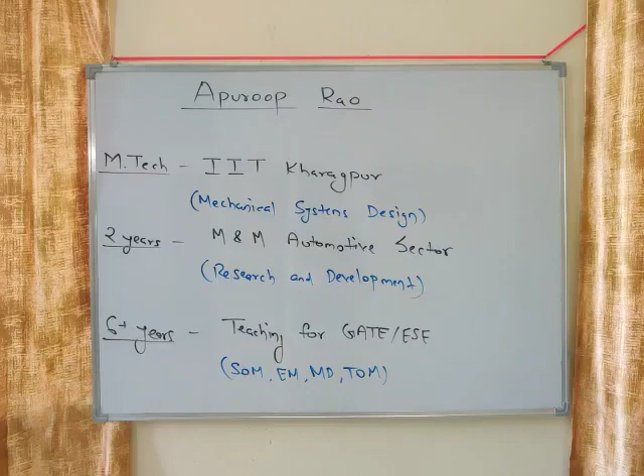Hello dear friends, welcome to another lecture of strength of materials, and today we are going to discuss some amazing concepts related to bending stresses of beams. We are going to discuss axial load plus bending moment, beams of uniform strength, and a very important and interesting topic, composite beams, my friend. So these are all the topics that we are going to discuss today.

Now those of you who are watching me for the first time, let me introduce myself. My name is Apuroop Rao, MTech from IIT Kharagpur. My specialization was mechanical systems design. Then I was recruited from campus. I worked for 2 years in Mahindra and Mahindra automotive sector, in their research and development department, and then I quit my job and I started teaching. I've been teaching for more than 6 years now. I've taught thousands of students preparing for GATE and engineering services, and I teach subjects related to design, strength of material, engineering mechanics, machine design, theory of machines. So you can see my love for design. My MTech was in design, then my 2 years of work was in design, and now my 6+ years of teaching is also related to design, my friends. And I guarantee you, if you keep watching my videos, you will also fall in love with design, my friends. Your concepts related to design will be crystal clear, my friends.

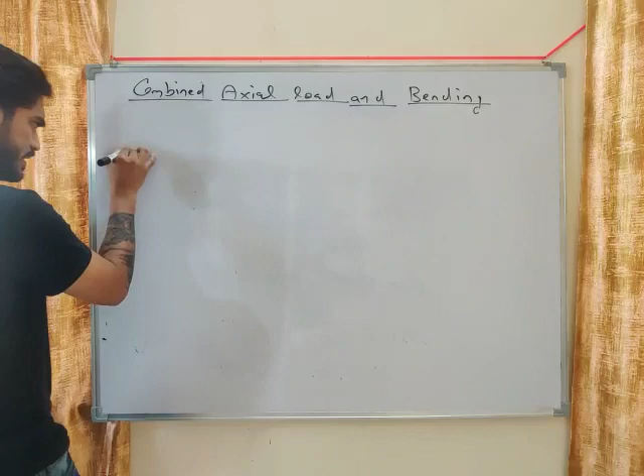Let's consider a simple example. Let's say we have a cantilever beam subjected to a bending moment M, and it is also subjected to an axial load P. So there are two types of load acting on the beam: an axial load P and a bending moment M.

This type of loading, where more than one load is acting on any body, is known as combined loading. So this is a problem of combined loading, my friend: there is an axial load and there is a bending moment.

Now we have to calculate the maximum normal stress in this beam. Our objective is to calculate the maximum normal stress, sigma maximum, in the cross section of the beam. So if there is axial load as well as bending, how do we calculate sigma max? Let's understand that.

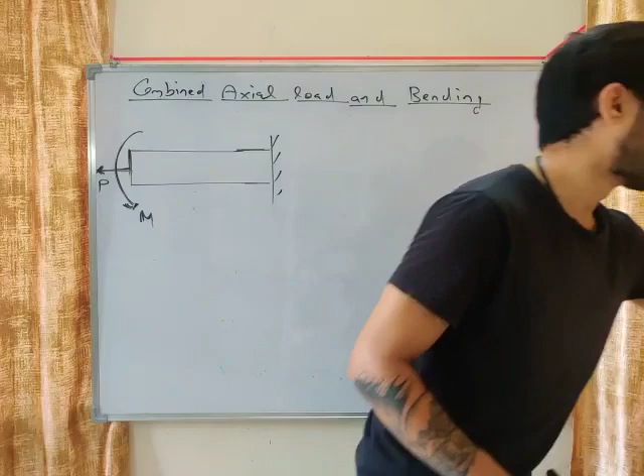Let's say the cross section of the beam is circular. This is the cross section of the beam — if this is the beam, then this is the length, and this side view is the cross section. Let's say it is circular, and this will be the neutral axis at the center.

Now there are two types of load acting on this beam: a bending moment and an axial load, so there will be an axial stress. Due to axial load, there will be axial stress, sigma A, which equals P divided by area. Since it is a tensile load, the stress will be tensile. This axial stress, sigma A equals P by A, will remain the same from top to bottom of the section.

And there will be a bending stress also.

What will be the value of bending stress? Due to this type of load, bending stress at top will be tensile and bending stress at bottom will be compressive. Both will be equal because the neutral axis is at the center. So bending stress at top will be plus My maximum divided by I, and bending stress at bottom will be minus My maximum divided by I.

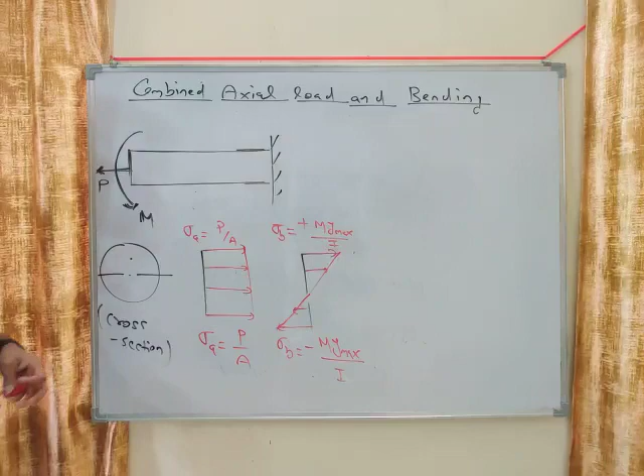So do you see? There are two stresses acting at any point. Consider any point on the cross section, it is subjected to two stresses. There is an axial stress P by A, which will be equal at every point, and there will be a bending stress My by I. It will be maximum positive at top and maximum negative at bottom. Our objective is to calculate maximum normal stress.

Now both these stresses are acting on the same plane and in the same direction. Both are acting on this plane and both are acting in x direction. So if two stresses are acting on the same plane and in the same direction, then the sum of those two stresses can be directly calculated.

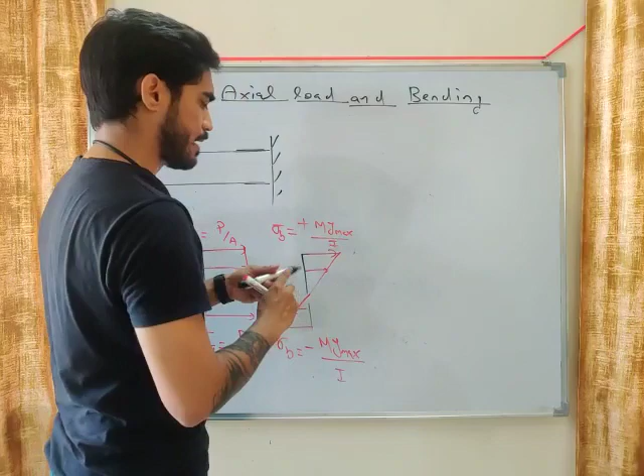Do you understand this point? If two stresses are acting on the same plane and in the same direction, then we can directly add these two stresses. If two stresses are acting on the same plane but in different direction, then we can't directly add them. But if two stresses are acting on the same plane and same direction, then you can directly add these two stresses.

So axial stress, bending stress, both are acting on the same plane, cross section plane, and both are acting in x direction, so we will directly add them. What will happen when you add these two? The tensile stress will be added, because up to from top to neutral axis the bending stress is positive and this is also positive, so both will be added.

But below neutral axis, bending stress is compressive, negative, but axial stress is tensile. So if both these will be added, sigma A it will become sigma A minus sigma B. So at top the stresses will be added and at bottom the stresses will be subtracted, since at top both stresses are tensile, but at bottom this is tensile and this is compressive, so both will be subtracted and you will get something like this.

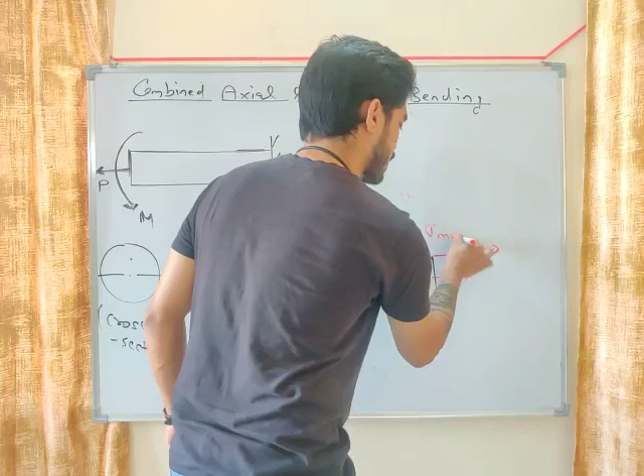This is sigma maximum in tension, and this is sigma maximum in compression. This is the maximum stress in tension and this is the maximum stress in compression. Do you understand this concept, my friend?

Let me explain it using an example so that you will understand better. Let's say the axial stress at top and bottom is 60 megapascal, and bending stress is 100 megapascal here and minus 100 megapascal here. So plus 60 at top, plus 60 at bottom, but bending stress is plus 100 at top and minus 100 at bottom.

So if you add them, what will you get? At top you will get 160 megapascal because both will be added, and at bottom it will be subtracted, 60 minus 100, so it will become minus 40. So your maximum tensile stress is 160 and your maximum compressive stress is minus 40.

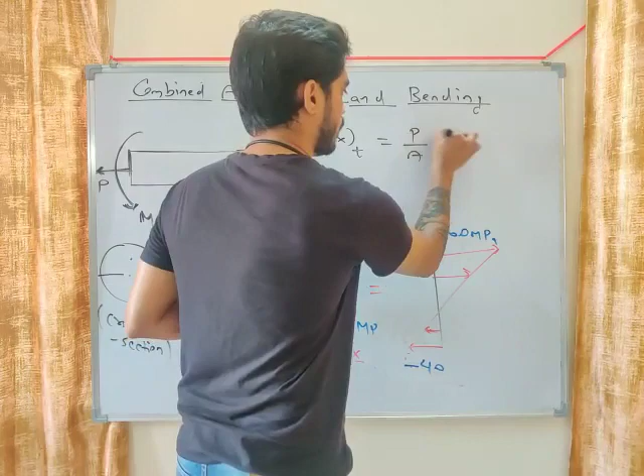Sigma maximum in tension will be equal to P by A plus My maximum by I. This is the maximum stress in tension, 160 megapascal.

For sigma maximum in compression, at the bottom the axial stress will remain positive. If it is tensile at top, it will be tensile at bottom also, so this will remain P by A, but the bending stress will become negative at bottom, so it will become minus My maximum by I. This is the formula for combined axial load and bending.

Very easy, my friend, you don't have to do anything. Yesterday we were calculating bending stress, right? My maximum by I. Today you just have to add the axial stress P by A. So you don't have to do anything, just add the axial stress in the bending stress.

Now don't forget the sign. If you are calculating tensile stress, then this will be plus, and if you are calculating compressive stress, then bending stress will be minus. So the sign of bending stress will depend upon whether you are calculating maximum tensile stress or maximum compressive stress. If tensile, bending stress will be positive; if compressive, bending stress will be negative.

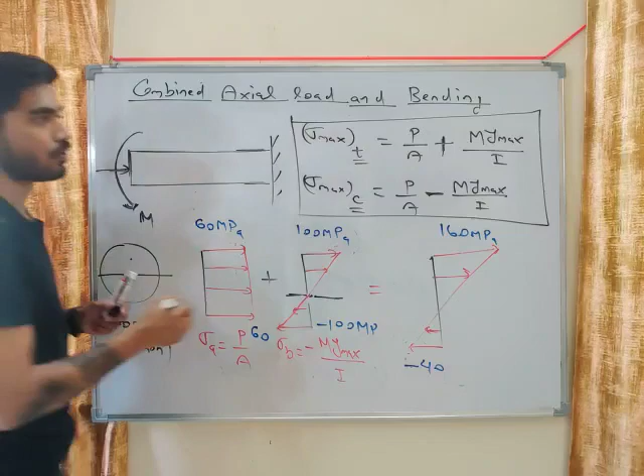Sign of P by A will depend upon the direction of force. If the force is tensile, then it will be plus P by A, doesn't matter whether you are calculating tension or compression stress, this will also be plus P by A. But if I apply a compressive load, then both these will become negative.

So do you understand the sign? Sign of bending stress will depend on whether you are calculating tensile stress or compressive stress, but sign of P by A will depend upon the direction of load. If load is tensile, it will be plus P by A, plus P by A. If load is compressive, it will be minus P by A, minus P by A. Do you understand this concept?

We have to calculate the total normal stress, which will be the sum of axial stress plus bending stress, my friend. Now we will solve some very interesting numericals directly from GATE.

You will see a lot of questions based on this, quite a few numericals based on combined axial and bending stress. So we will solve them one by one from previous year GATE questions. I am trying to solve as many previous year questions as possible, so that you will get an idea what type of question will be there from every topic.

So let's solve some numericals related to combined axial load and bending. What you have to do? You have to just add the axial stress and bending stress. Axial stress will be P by A, bending stress will be My by I. So you just have to add them, but you have to take care of the sign, whether it will be positive or negative. This is very important, my friend.

So let's see the first numerical, my friend. Most of the students get confused in this numerical, but I will tell you a very simple way to understand this question. So this is the question, what is given in the question?

We have a link which is under a pull. This is a link, or you can say it is a bar, link, bar, beam, whatever you can say. Cross section is rectangle, this is 50 mm and this is 15 mm.

It is under a pull. A load is applied like this, it is under a pull of 4 kilonewton. Pull means tensile load, so it is under a pull of 4 kilonewton. And what you have to calculate? You have to calculate sigma maximum in compression, the maximum compressive stress. So this is the problem.

Note down this problem, and then we will try to solve it, my friend. Very important problem, this was asked in engineering services, but very important question. So note down this question, and then we will try to solve it using our procedure.

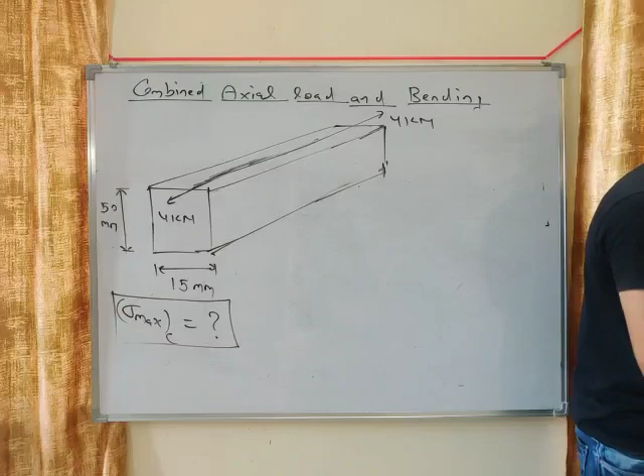Now the problem is that people get very confused about this diagram. What is this diagram? They are not able to understand because the visualization is wrong, my friend. So I will tell you how properly this question should be visualized, how to imagine this problem, how to see this problem.

So this diagram that is given is an isometric view, a 3D view. What you have to do is draw this two-dimensional view, my friend. Draw this front view of the link. Okay, so this is the link. From front it will look like this, and from side it will look like this. This is the side view.

In the question, an isometric view was given, but this is the front view and this is the side view, or you can say cross section view. What is the cross sectional area? 15 mm by 50 mm. Width is 15, height is 50, and this is the front view.

The load is acting like this. This is 4 kilonewton, this is 4 kilonewton. Now you will be able to analyze it properly, visualize it properly.

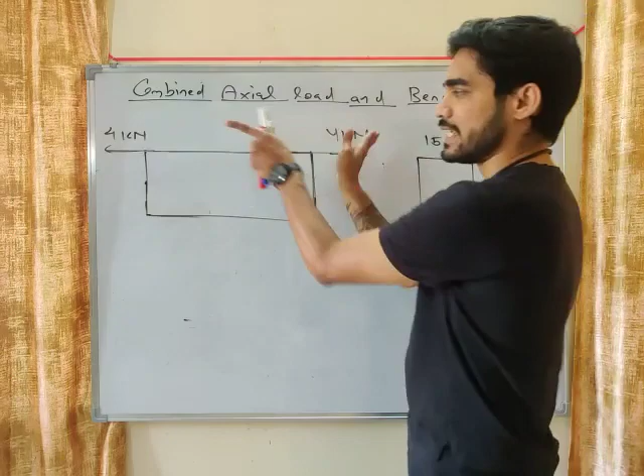Now see, this is a bar subjected to axial load. This is an axial load in the direction of length. If it is acting like this, transverse load; if it is acting like this, axial load. So this is an axial load.

But what is the problem, my friend? This is the cross section, side view. This is the plane where we have to calculate the stress. Look at this force - this force is not acting at the centroid of the cross section. Centroid of the cross section is here, but the load is here.

I told you, in case of axial load, whenever there is a load acting anywhere, whenever you have to calculate the stress on any plane, you have to transfer the load to the centroid of the plane. So right now the load is acting at the top, but the centroid is here. So what we will do in this problem is transfer this force from here to the centroid, my friend.

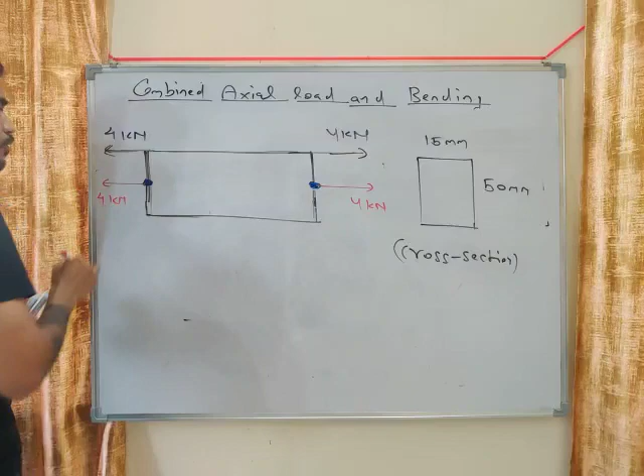So if you transfer this load from the top to the centroid, what will you get? You will get a force of 4 kilonewton, no problem there. The force will remain the same, 4 kilonewton, but there will be a moment due to this distance.

What will be this distance, my friend? Total height is 50, so this distance will be 25 mm. So due to this distance, it will create a moment like this. What will be this moment? 4 into 25 means 100 kilonewton mm. That much moment is developed.

So now we have transferred the force to the center of the beam, my friend. So what are we getting? We are getting two types of load. Now we have an axial load as well as a bending moment. Very important concept, my friend.

Whenever there is a load acting anywhere on the body, and you have to calculate the stress at any plane, transfer that load to the centroid of the plane. So I have transferred 4 kilonewton to the centroid, and so I am getting a moment also.

Now what do we have to calculate? We have to calculate maximum compressive stress. Now, I told you the sign of axial load will depend upon the direction of force. So the direction of force is tensile, so this will be plus P by A. Axial stress will be plus P by A.

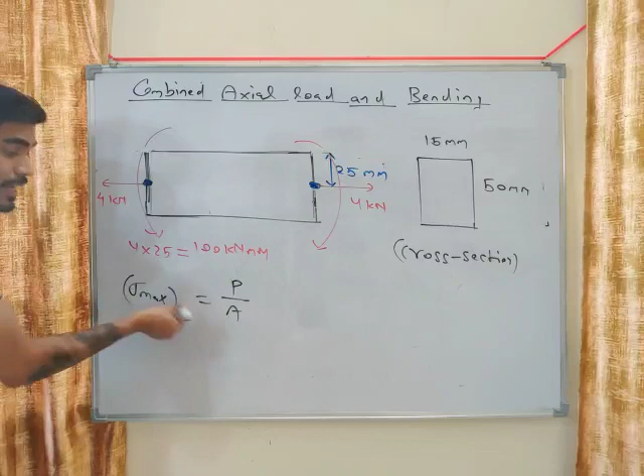But the sign of bending stress will depend upon what we are calculating. Here, what are we calculating? Compressive stress. So if we are calculating compressive stress, then this will be minus M y maximum by I. Do you understand this, my friend? P by A, the sign of this depends on direction of force - it is tensile, so it will be plus. But for bending stress, we are calculating compressive stress, so it will be minus.

Now put the values here, my friend. Very easy, put the values here, you will get the answer. So what is the value of force? 4 kilonewton means 4 into 10 to the power 3 Newton. What is the area, my friend? This is the cross section, so what will be the area? 15 into 50. Then minus, what is the bending moment?

100 kilonewton mm, we have to convert it into Newton mm. So it will be 100 into 10 to the power 3 Newton mm. I converted kilonewton into Newton.

What will be Y maximum, my friend? 25. Y maximum means the distance of top or bottom from the centroid. So Y maximum is 25 divided by I. So what will be I? BH cube by 12, 15 into 50 cube by 12.

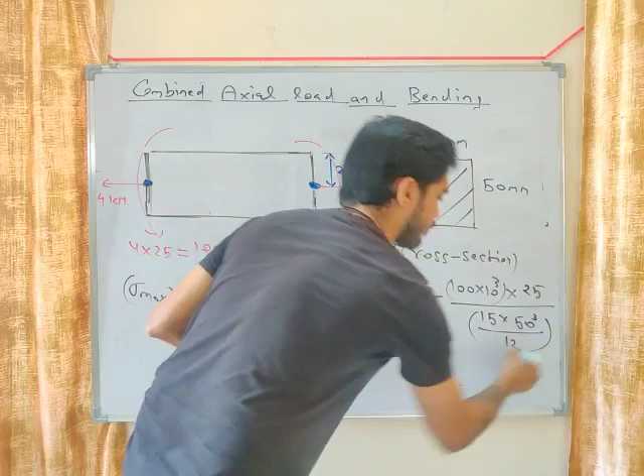So this is My maximum by I. So what will you get, my friend? Maximum stress in compression. Calculate it and tell me what will you get. So this will become 4 into 10 to the power 3 divided by 15 into 50.

This will become 5.33 minus My maximum by I. If you solve it, this will become 16. So what will you get, my friend? 5.33 - this is the axial stress, and 16 - this is the bending stress.

What will you get? You will get minus 10.67 megapascal. Why negative sign? Because our stress is compressive. If you add them, you will get a compressive stress. So do you understand? Minus 10.67 megapascal. This is the answer, my friend.

Okay, so do you understand the problem, my friend? Let me explain it using a diagram, using the diagram let me explain the same thing, what is happening here. Okay, so this is the cross section, my friend.

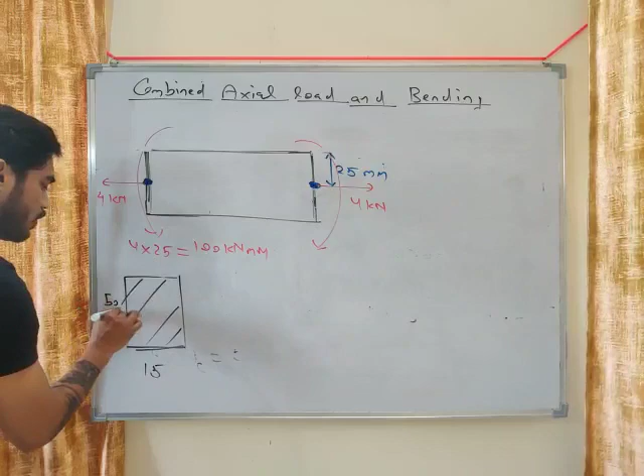15 mm by 50 mm. This is the cross section, 15 mm by 50 mm. This is the neutral axis. What is the axial stress we calculated? 5.33, right? Axial stress that we calculated is 5.33, so it is acting like this. This is 5.33. From top to bottom, the stress is

5.33 megapascal. Okay, bending stress is how much? 16 - bending stress is 16. So it will be plus 16 at top and minus 16 at bottom. So bending stress is like this: plus 16, minus 16. Now what we are doing?

We are adding both of them. So what will we get? At top, the stress will become 16 plus 5.33, the stress will become 21.33. And at bottom, how much will you get? You will get minus 10.67.

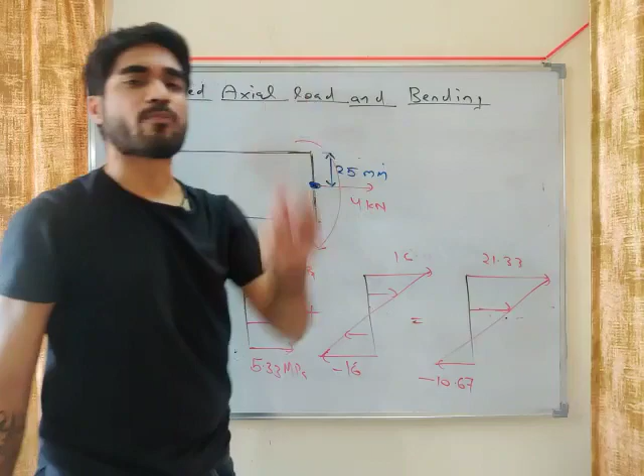So do you understand? In this question, they were asking maximum compressive stress, so what we did: 5.33 minus 16 minus 10.67. In the same problem, if they ask you to calculate maximum tensile stress, then what you will do? 5.33 plus 16, so it will become 21.33. So in this question, maximum tensile stress is 21.33, maximum compressive stress is minus 10.67 megapascal.

Very important question, my friends, because the same concept, the questions based on these concepts are repeatedly asked in GATE, engineering services, any PSU exam. Okay, so very important concept. Understand this concept. Okay, so we have solved one problem, my friend. We will solve a few more problems based on this concept so that you will understand it properly.

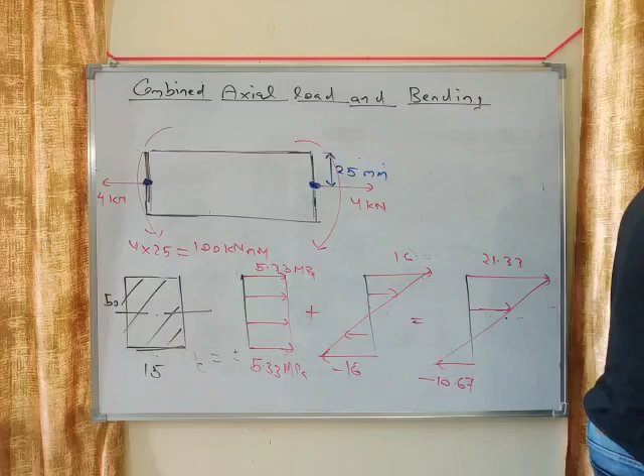Okay, now another question, my friend. This time I will pick a question from GATE. So this is the question, my friend, from GATE 2008 civil engineering question. Okay, I will solve a problem from GATE 2008 civil engineering question. Okay, another very interesting question.

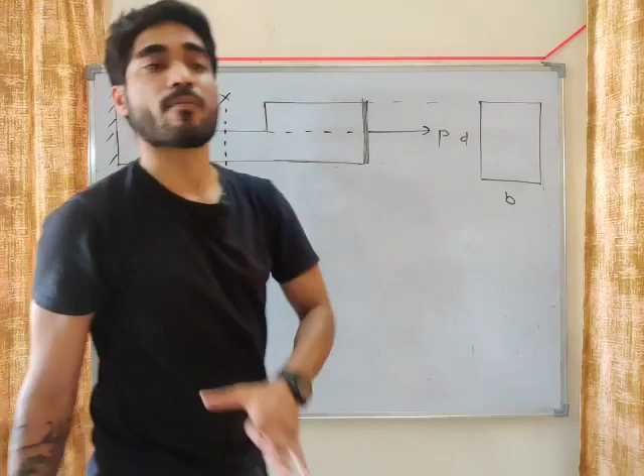I am expecting solution from you guys. Please solve this question, please solve this question. Understand the problem first. Understand the diagram first, my friend.

What they are asking you to calculate is stress at this plane, not at this plane. The load is acting directly at the centroid of this plane, but the force is not acting at the centroid of this plane. So what do you have to do?

The centroid of this plane will be here on this line, but the force is right now not acting at the centroid of this plane xx. So what you will do, you will transfer force P from here to here. Right now it is acting here, I have to transfer it here, because centroid of this plane xx is here.

So if you transfer it here, what you will get? A force P, and you will get a moment. Okay, what is this distance, my friend? Tell me what is this distance. This height is d by 2.

This total height is d. This height is given, this height is d by 2. The height of xx plane is d by 2. So what will be this? D by 4, this will be d by 4. This total height is d, this height is d by 2, this height is d by 2. And this height from this center to this center is d by 4.

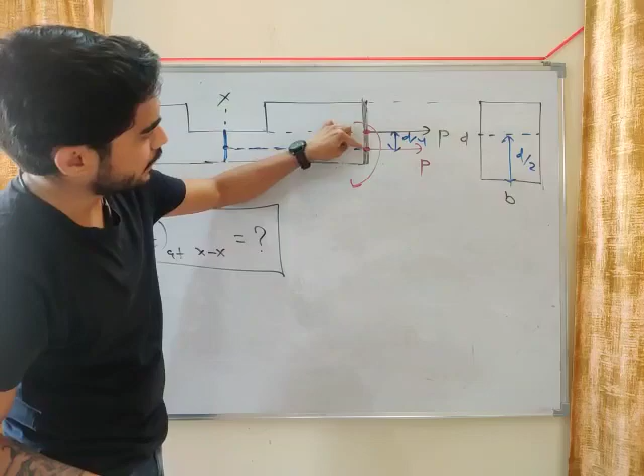So what will be the moment, my friend? Moment will be PD by 4, my friend.

Now calculate the maximum tensile stress at xx plane, my friend. So what you have to do? Axial stress plus bending stress. You have to calculate maximum tensile stress, right? So it will be P by A. P is tensile, so it will be P by A, and bending stress will be tensile because we are calculating tensile stress. So bending stress will be plus My maximum divided by I.

Okay. Now put the value here. Force is P. What will be the area? Now most of the students, what they do? Area B into D. You are not calculating stress on this plane. The area of this plane will be B into D, but the area of this plane, XX plane, it will be only this much.

This much. So what will be the area? B into D by 2. The area will be only this much, B into D by 2, because we are calculating stress on this plane, not on this plane.

Okay. Plus, what is the moment, my friend? PD by 4. What is Y maximum, my friend? What will be Y maximum? D by 4. Okay, look at this area, forget about this area. Now this is your area.

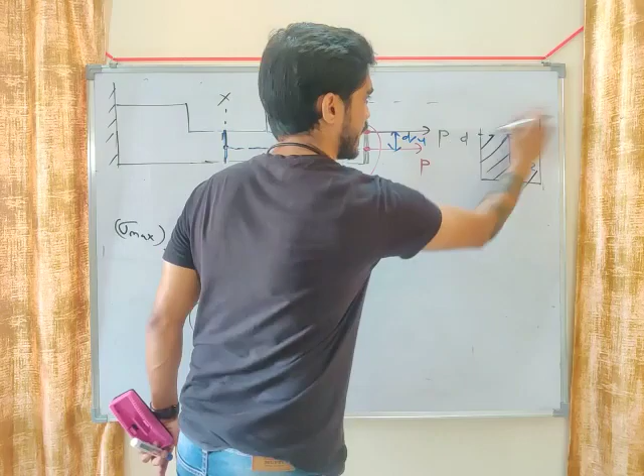So what will be Y maximum, my friend? Total height is D by 2. So Y maximum will be D by 4, divided by I. So what will be I? BH cube by 12, height is D by 2. So B into D by 2 cube by 12. Okay, this is your I.

Now add these two, what you are getting? Calculate it, what you are getting? This will be 2P by BD, plus. Calculate it, what you will get? This D will be cancelled. Okay, this will become how much? Calculate it, how much? This will become 12.

This will become 6P by BD. Let me check my answer. So 2P by BD plus 6P by BD. What you will get? Tell me in the live chat. What you will get? 8P by BD.

This is the maximum tensile stress in the cross section. If I ask you to calculate maximum compressive stress, what will you get? 2P by BD, and this will become minus 6P by BD, so maximum compressive stress will be minus 4P by BD.

This minus this. But here I am asking you to calculate maximum tensile stress, so it will be this plus this, 8P by BD. So this is the answer to this question, my friend.

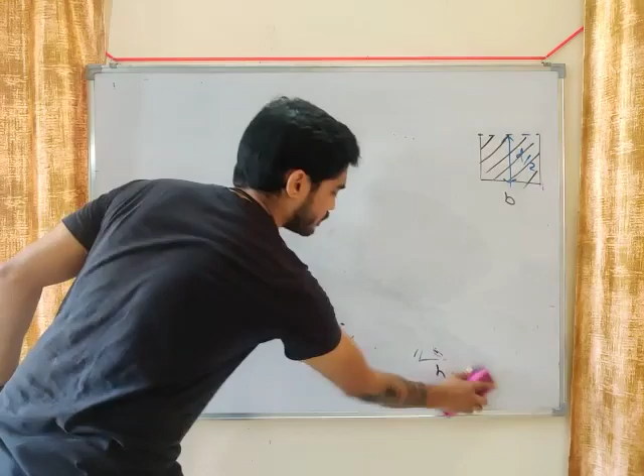All right, so let's move on to the next question. We will solve one more question because it is a very important concept, one more question from combined axial load plus bending, my friend. So what question will we solve?

Another question from GATE, this time from mechanical engineering. This was asked in GATE 2008 from mechanical engineering.

So this is a beam, an L-shaped member. This is force F. The cross section is this, 2B by 2B. This is the cross section.

They are asking you to calculate what will be the sigma at this point, sigma at point P. This distance is given as L minus B. They are asking you to calculate what will be the sigma at point P, here. This is point P. They are asking what will be sigma here. So do you understand this question?

This is the cross section 2B into 2B. They are asking you to calculate what will be the stress at point P. What will be the stress at point P?

So what will you do, my friend? Point P is a part of this cross section, right? It is at the top of this cross section. Now the cross section has a centroid here. This is the centroid, and the force is not acting at the centroid. So what will I do?

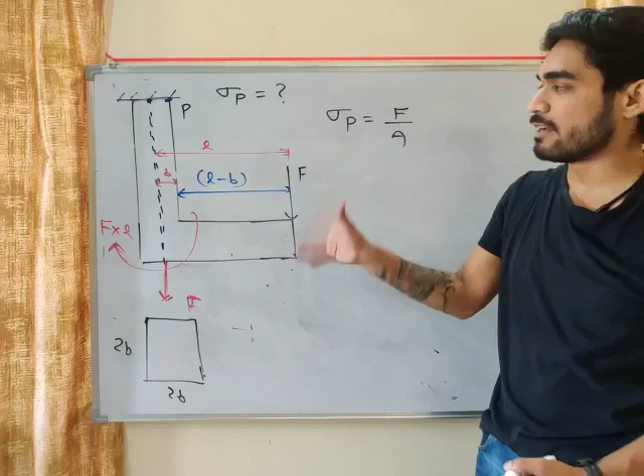Tensile or compressive? Tell me, will it be tensile or compressive? It will bend like this. So tell me, at point P, will there be tensile stress or compressive stress?

There will be tensile stress. Look at this, the length will increase here, so this will be tensile stress, so plus My by I.

Here Y will be maximum, so My maximum by I. So what is the area, my friend? 2B into 2B, this is the cross section. So area will be 2B multiplied by 2B, plus what is the moment, my friend?

F into L. What is Y maximum? B. And what will be I? 2B into 2B whole cube divided by 12, BH cube by 12. This will be sigma at point P.

So do you understand this? What will be the area?

2B into 2B, what will be the moment M? Moment is F into L. We transferred the force F on the centroid, not at point P. Don't get confused, we are not transferring the force at P, we are transferring the force at the centroid.

Then we put the values in the equation. What will you get here? F upon 4B square, what will you get here? This will become B, this B will be cancelled. What will you get here? You will get 3 into L.

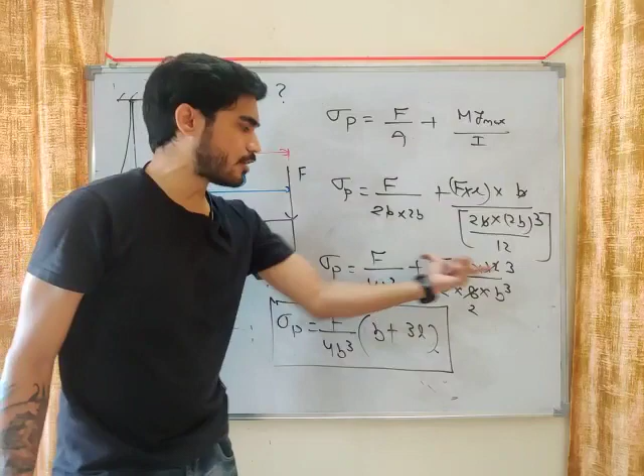This is the stress at point P, normal stress at point P: F upon 4B cube into B plus 3L. Solve this equation and you will get this: F upon 4B cube into B plus 3L. I have taken F upon 4B cube common, so you are getting B plus 3L. This is the normal stress at point P.

So do you understand this question, my friend? Do you understand the solution? I have taken 3 examples from previous year GATE and engineering services questions to explain the concept of combined axial load plus bending.

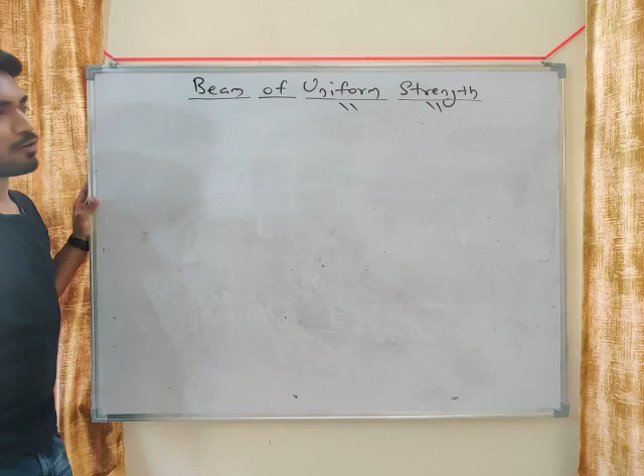So we will discuss this concept in detail so you get the entire concept clear about beam of uniform strength. First, what is uniform strength? Note this down if you want. I will write the definition so you understand it: beam of uniform strength is a beam where maximum bending stress at every section of the beam is constant.

Note this definition, understand this definition, my friend. Beam of uniform strength is a beam where maximum bending stress at every section of the beam is same or constant. So beam of uniform strength is a beam where maximum bending stress at every section is same.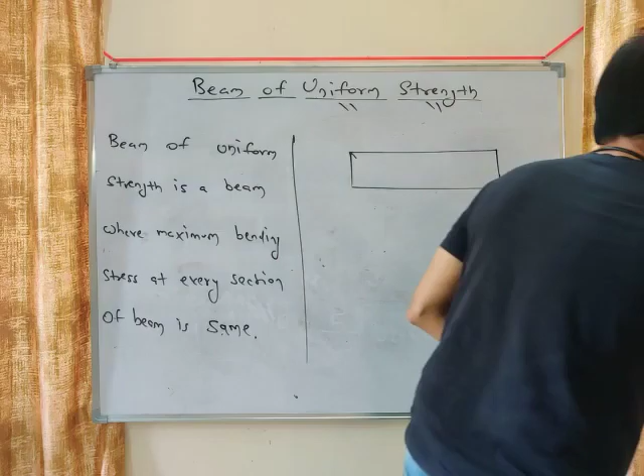Now I will explain this using an example. Let's say this is a beam. Now there are different sections of this beam: this section, this section, this section. So there are different sections, section 1, section 2, section 3. It will be called a beam of uniform strength if it is subjected to maximum bending stress same at every section.

If the maximum bending stress, let's say sigma maximum at this section, is 100 megapascal, sigma maximum at this section is also 100, and sigma maximum here is also 100. So you can see sigma maximum at this plane, this plane, this plane is same. So this beam is known as beam of uniform strength, my friend.

Okay, now let me tell you using an example how do we get a beam of uniform strength. Let's say we have a prismatic beam.

What do we mean by prismatic beam? What do we mean by this word prismatic? Tell me in the live chat. What is prismatic, my friend? This word is used many times.

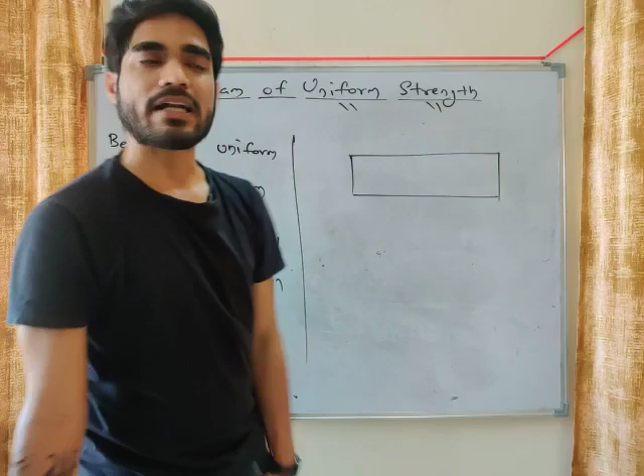So what is prismatic? Prismatic means cross section is constant. Cross sectional area from here to here is constant. This is not a prismatic beam, this is a tapered beam. This is a prismatic beam. Do you understand the meaning of prismatic?

So this is a prismatic beam subjected to pure bending. Now another concept, pure bending. Yesterday we discussed what is pure bending. If it is only subjected to bending moment, then it is pure bending. And you can see that from here to here, bending moment is constant at every section.

Now consider two sections. This is, let's say, section 1-1. This is section 2-2. What will be sigma maximum, my friend?

Sigma maximum means m into y maximum by I, right? Or I can write it as m by z. What is z? Yesterday we discussed section modulus. Z is nothing but I by y maximum. For rectangle it is bh square by 6, and for circle it is pi by 32 d cube. So I can write m into y maximum by I as m by z.

This is sigma maximum. Now for 1-1, what will be the value of bending moment, M? From left or from right? There is only one couple, m. So what will be the bending moment at this plane? M. What will be the bending moment at plane 2? Same, m. So bending moment at 1-1 and 2-2 is same, m.

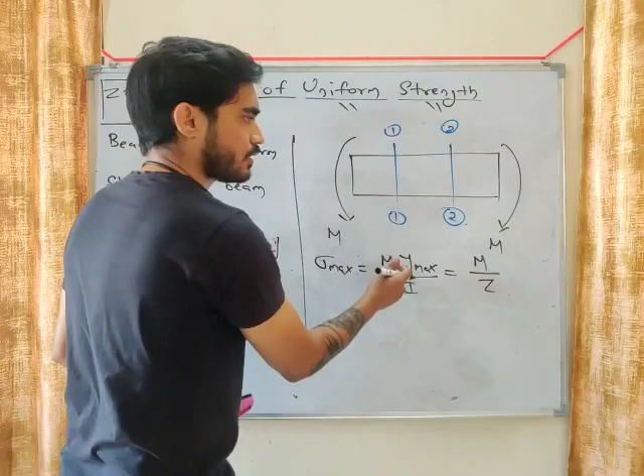Now z at 1-1 and z at 2-2 will also be same, right? Because the cross section is constant. So z of this plane and z of this plane will also be same. That means m and z of both these planes are same. So sigma maximum of plane 1-1 will be equal to sigma maximum of plane 2-2.

So what does this mean? This beam is a beam of uniform strength, because the maximum bending stress at this plane and at this plane is same. M is same, Z is also same, here and here.

So note this point down right now, okay? And nobody will tell you this. Prismatic beam subjected to pure bending is a beam of uniform strength. Note this in your notebook, my friend, and highlight this point.

What do we mean by uniform strength? Maximum stress should be same from this end to this end. At every section, maximum bending stress should be same, then it will be called beam of uniform strength. Do you understand the meaning of beam of uniform strength, and the example? A prismatic beam subjected to pure bending is a beam of uniform strength, my friend. It is a very important concept.

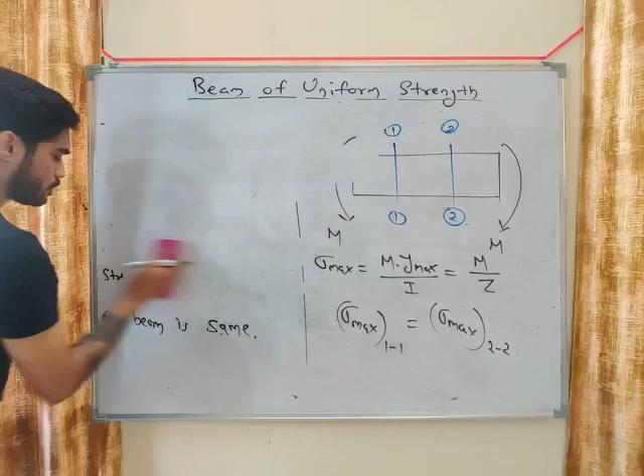Okay, now this is a prismatic beam subjected to pure bending. Let's consider a prismatic beam, but it is not subjected to pure bending. Let's consider a cantilever beam. It is a prismatic beam because cross sectional area is constant, and it is subjected to a load W here. Let's consider two planes, plane 1-1 and plane 2-2. Let's say this distance is 1 meter, and this distance is also 1 meter.

Now, sigma maximum is m by z. So what will be sigma 1-1 here? M will be W into 1. Forget about the sign convention, don't worry about plus W minus W right now. What will be the bending moment at this plane?

What will be the bending moment at this plane? M will be W into distance 1, so W into 1 meter. Now what will be the section modulus? Z, right? So the bending stress will be W by Z, which is the bending moment divided by Z.

What will be the stress at point 2,2, the maximum bending stress? What will be the bending moment there? W into 2 meter, so it becomes 2W. But Z will remain the same because this is a prismatic bar. So bending stress at 1,1 is W by Z, and bending stress at 2,2 is 2W by Z.

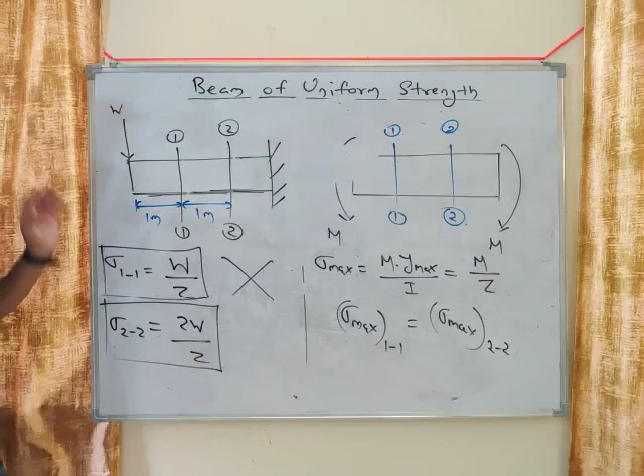So is this a beam of uniform strength? No, it is not, because the bending moment is different while Z is constant. In the equation sigma max equals M by Z, M is different and Z is constant. If Z is constant and M is different, sigma will also be different. Here sigma is W by Z, and here sigma is 2W by Z.

So this is not a beam of uniform strength, but we can make it one. I will explain how you can turn any beam into a beam of uniform strength. We will discuss the procedure for designing a beam of uniform strength - a very important procedure.

You might get a theory or conceptual question based on this concept. So let's say we have a cantilever beam subjected to load W, with length L. The height of this beam is constant H, but the width of the beam is not constant.

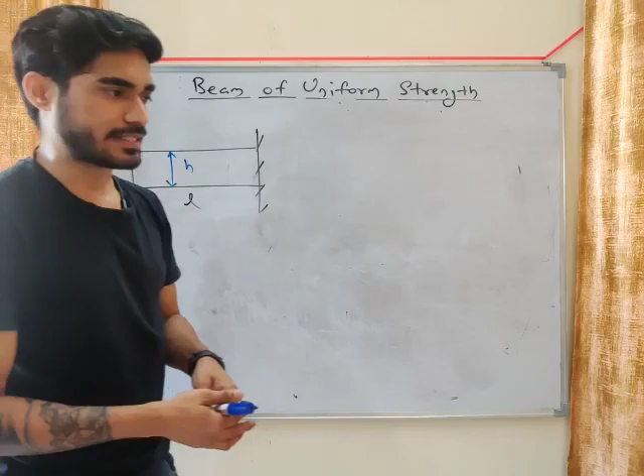Width of the beam means, let's say this is a beam - this is the height you see from here, and if you look at this beam from the top, this will be the width. This body has constant width - this is the height, this is the width you see from top. Right now the width is constant.

But if the cross section is constant, it will not be a beam of uniform strength. See, sigma maximum is M by Z. M is not constant, M is changing from here to here - M is increasing. Now if Z is constant and M is increasing, then sigma will also increase.

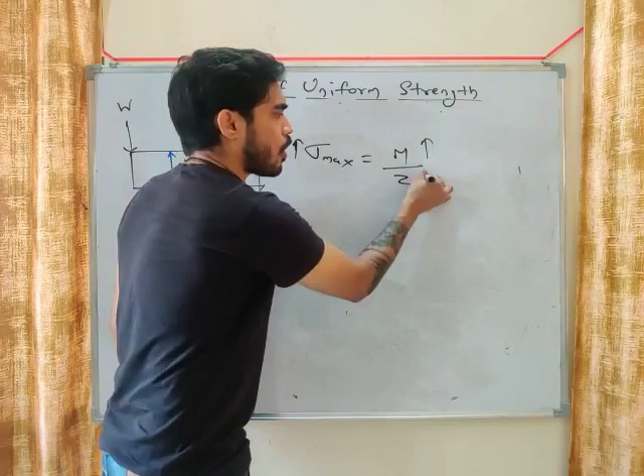So what you have to do: if M is increasing, Z should also increase in the same ratio. If M is getting doubled, Z should also get doubled. If M is getting tripled, Z should also get tripled. Then this ratio will become constant, and sigma will become constant.

So what you have to do in this beam is increase the value of Z. Now what is Z of a rectangle? Z of rectangle is BH square by 6. Now I am telling you that H should be constant. So if you want to increase Z, what will you increase? You will increase B, the width.

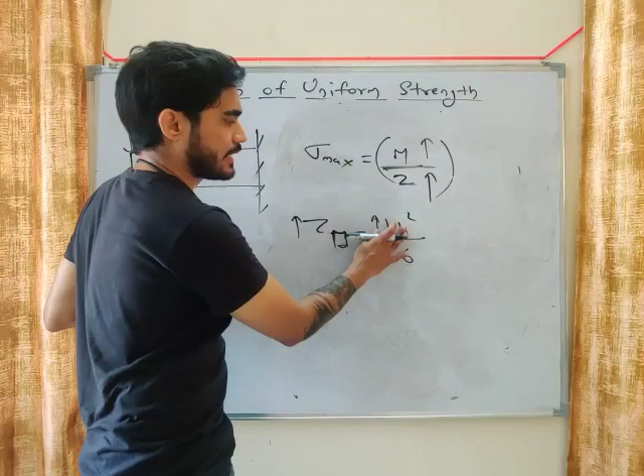So in order to make this beam of uniform strength, as M increases, Z should also increase in the same way. Then this ratio becomes constant, sigma becomes constant, and it becomes a beam of uniform strength. If you keep Z constant while M increases, sigma will increase - but I don't want sigma to increase, I want it constant. So if M is increasing, Z should also increase. Z equals BH square by 6, and since H should be constant, B should increase.

In order to increase Z, B should increase. Now what is the equation of M? What will be the equation of M?

Consider any section at a distance x, with height H. What will be the equation of m? Wx, okay forget about the sign. M will be Wx. So how is m increasing?

Linearly. So how should z increase? Linearly, it should increase linearly. And z increasing means b is increasing. So m is increasing linearly, so z should increase linearly, which means b should increase linearly.

So this beam, if you look at it from top, this is the side view. We are looking at the beam from this view. If you look at it from top, then the width should be like this. This will be a linear variation of width.

Why is the width varying linearly? Because m is varying linearly, so z should also vary linearly. If m is varying parabolically, z will also be parabolic, so that ratio will become constant. So if m is increasing linearly, z should also increase linearly.

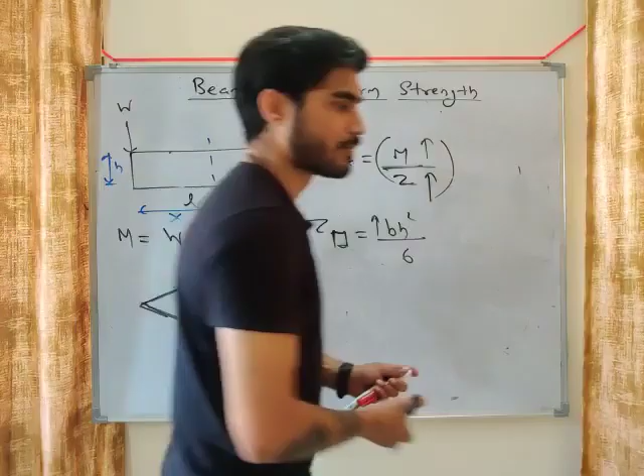I am telling you that we need to keep h constant, so b should vary linearly. Now this is the logical explanation. Let me tell you mathematically how this will be a linear variation.

So what we are going to do, let's say the maximum width is b. Maximum width is fixed, we cannot increase the width beyond this. So let's say maximum width is b. Now what we will do, for this beam of uniform strength...

Sigma maximum at every section should be same. For beam of uniform strength, sigma maximum at every section should be same. So sigma maximum at this x section should be equal to sigma maximum at the fixed end. If it is a beam of uniform strength, sigma maximum here and here should be same.

Now what will be sigma maximum at this plane? M by z, right? Sigma maximum means m by z. So what will be m? W into x. On this plane, m will be W into x.

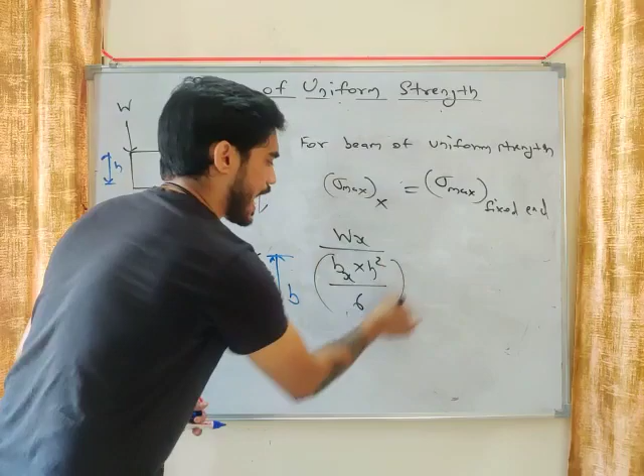What will be the height, my friend? What will be z, my friend? Let's say the width here is bx. So I will write this as bx into h square by 6. Height is constant. This will be equal to m by z.

M by z of this plane should be equal to m by z at the fixed end. So what will be the m at the fixed end? W into L. Bending moment at fixed end will be W into L, divided by z at the fixed end.

So at the fixed end, the width will be b, the maximum width, and height is constant. So this will become b h square by 6. We are assuming rectangular section. Okay, now...

W into 6, into h square, this all will be cancelled. What will you get from here? B at any section x will be equal to b into x by L. B into x by L.

Look at this equation, what is this equation? This is the equation of a straight line, that's why we are getting this. If it is x square, then it will become parabolic. Right now it is a straight line.

So this is the beam of uniform strength: at any distance x, your width should be b into x by L. So at any distance x, the value of width will be bx by L. So the width should be like this.

If the width is constant, your z will become constant. M is changing and z becomes constant, so sigma will start to change. But right now, what is happening? M is also varying linearly, z is also varying linearly, so your ratio m by z will become constant. And now your beam has become a beam of uniform strength.

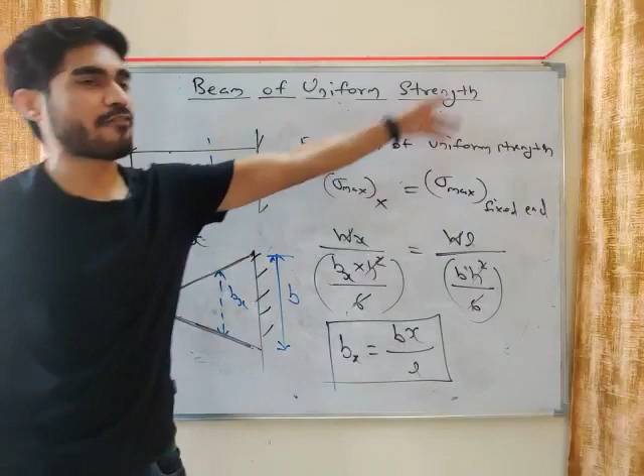So this is the procedure to make a beam of uniform strength. You will get a question from this particular example, which is very important. Cantilever beam subjected to point load, height is constant. How should the width vary? Width should vary linearly. For the beam to be of uniform strength, width should vary linearly.

So this is a procedure of making a beam of uniform strength. I hope you understand the concept behind beam of uniform strength, my friend. Very interesting concept. Now we will move on to the next very interesting topic, my friend.

The next topic is known as composite beam. Now, what is a composite beam? I told you the meaning of the word composite - it means made up of more than one material. So composite beam is a beam made up of more than one material. In this topic, we are going to discuss beams which are made of more than one material.

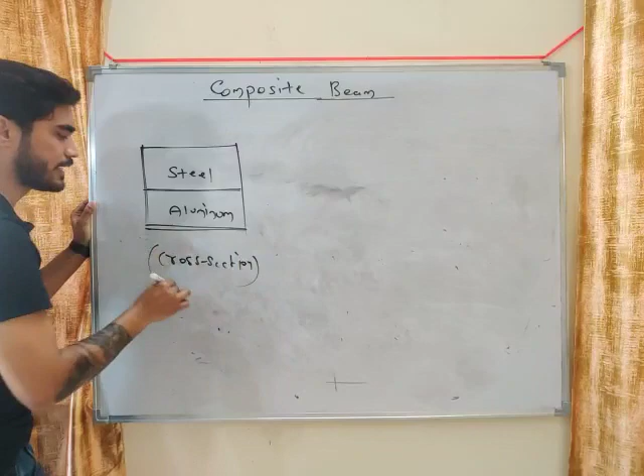What will be the examples of composite beam? This is an example - steel, aluminum. There are two different metals, steel and aluminum. This is the cross section of the beam - half of the cross section is made of steel, half is made of aluminum. So this is an example of composite beam.

This is another example of composite beam. Let's say there is a wooden beam. At top and bottom we have steel plates - this is known as reinforcement. Wooden beams - usually in many structures you will see wooden beams, especially in foreign countries where the temperature is very low, they make structures of wood so that heat will be trapped inside the home.

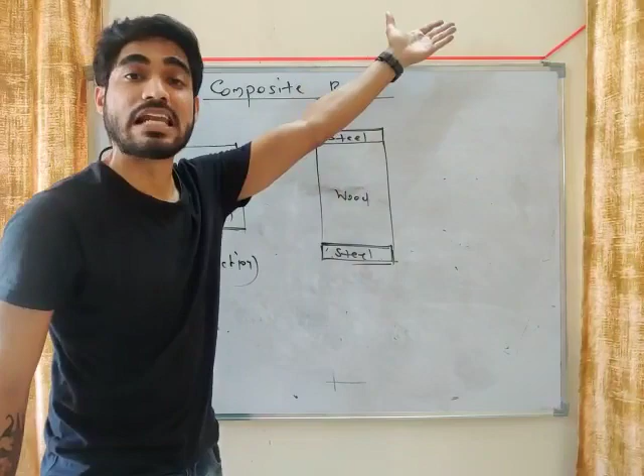Now, wooden beams are very weak, their strength is very less. So if you want to increase the strength of wood, you reinforce it with steel plates. Here we are placing two steel plates at top and bottom so that the strength of the wooden beam will increase. Let's say right now it is only capable of sustaining 10 kilonewton meter moment - if you put steel plates, then it will start to sustain more than 10 kilonewton meter. The strength of the beam will increase. So this is known as reinforcement.

Look at these two beams - they are made of more than one material. Here there are two materials, steel and aluminum. Here there are two materials, steel and wood. So this is known as composite beam. In this topic, we will see how we can calculate bending stress in these type of beams.

In this type of beam, you cannot directly use sigma equals to m y by I. Why? Which theory did we use to find this sigma? Sigma by y equals to m by I equals to E by R - this equation is derived from Euler-Bernoulli's beam theory, and in that theory there is an assumption that the material is homogeneous. Right now, is this material homogeneous? No. Homogeneous material means at every point the property should be same, but here the property of steel is different, property of aluminum is different, and property of steel and wood are different.

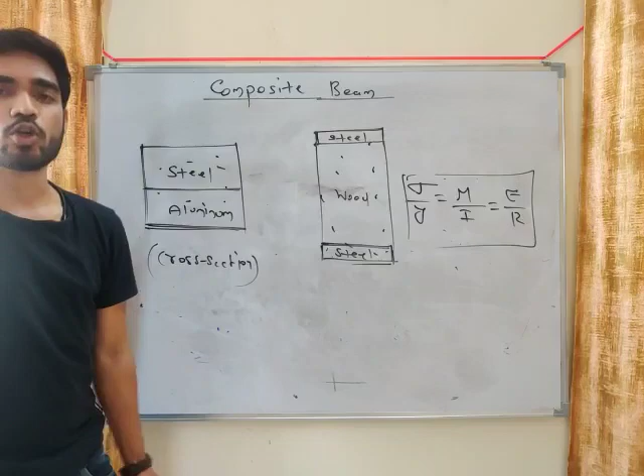So this is not homogeneous, and if the material is not homogeneous, we cannot directly use this equation sigma by y equals to m by I equals to E by R. So in this problem we will discuss what we have to do, and we will try to solve numericals based on composite beam. Look at this example of composite beam - we will take an example and try to understand how we can calculate bending stress in a composite beam.

Very important concept, my friend, composite beam is a very important concept. Okay, so let's see how to solve problems of composite beam. I will try to explain the concept behind composite beam using an example.

Let's consider this particular example. Let's say we have a cantilever beam of wood, subjected to a load like this. But wood is very weak, so in order to increase the strength of this, I am putting steel plates at top and at bottom, one at top, one at the bottom.

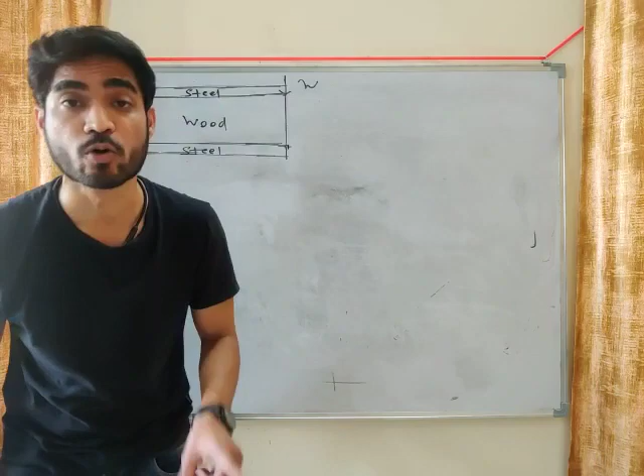So we have a wooden beam which was very weak, so what I did, I put steel plates on top and on bottom. This is the cross section of the beam. This is steel, this is steel, this is wood. This is what? Cross section.

Cross section means if you look at this beam from the side, it will look like this. Let's say this is the beam, then this will be the cross section. So this is the front view, and this cross section is the side view.

Now what will happen in this beam? Let's understand. When you apply the load like this, the beam will bend like this. This is steel, this is steel, this is wood, right?

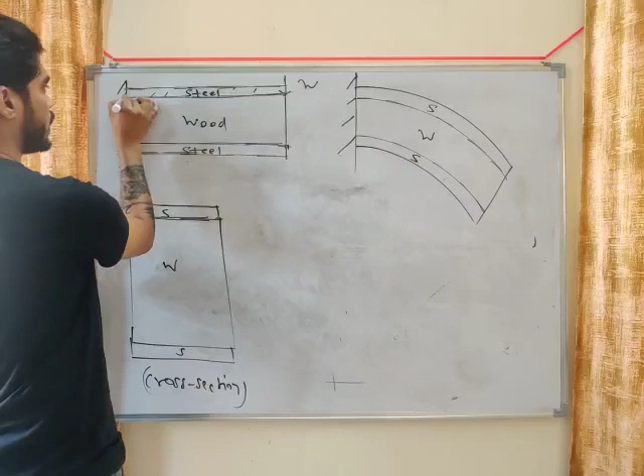Now look at this plane. What is this plane? This is the plane where steel and wood are touching each other, this is the plane where both are touching each other.

The change in length of steel and change in length of wood on this particular plane are both equal, my friend. This is the initial length and this is the final length. It will not bend like this, this cannot happen, that wood will elongate more and steel will elongate less. This cannot happen because both these bodies are completely attached with each other. So if steel elongates this much, wood will also elongate that much.

So the change in length of steel at this plane, on this blue line, change in length of steel and change in length of wood is equal. Now what is change in length divided by length, delta L by L? Delta L by L is normal strain, epsilon. So epsilon on this plane will be same for steel and wood.

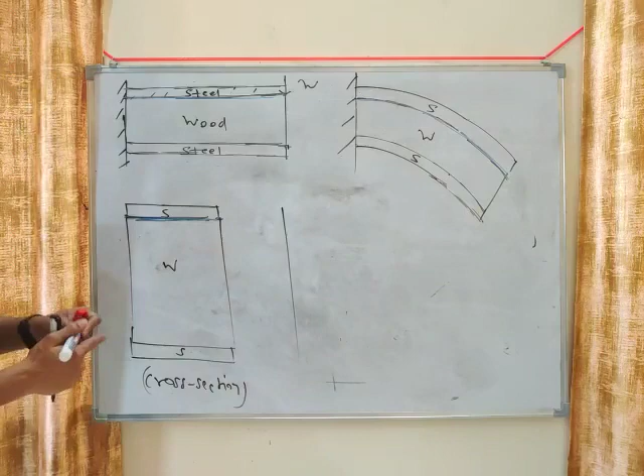Let's say this is the distribution of epsilon. What will be the distribution of epsilon? It will be linear. Distribution of strain will be linear, we have discussed it yesterday - distribution of stress and distribution of strain, bending stress and bending strain, both will be linear.

So this will be the strain. Look at this plane, here epsilon of steel is equal to epsilon of wood. Whatever epsilon you are getting in steel on this plane, epsilon of wood is also same. Do you understand this concept? Yes, you understand this concept.

Now, what is sigma, my friend? Sigma is E into epsilon. If you assume that this obeys Hooke's law, if you assume that stresses are within proportional limit, then you can use Hooke's law. So what is sigma? E into epsilon. These are all the values of epsilon. If you multiply them with E, what you will get? Sigma.

This is the value of epsilon from top to bottom. At the top, the epsilon is this much. Here epsilon is this much. Here epsilon is 0, and here epsilon is this much. If I multiply E, what will I get? Sigma.

E of wood is very less, let's say 10 gigapascal. So this will be E into epsilon of wood, which gives sigma of wood. This will be sigma of wood, this much, because E of wood is less.

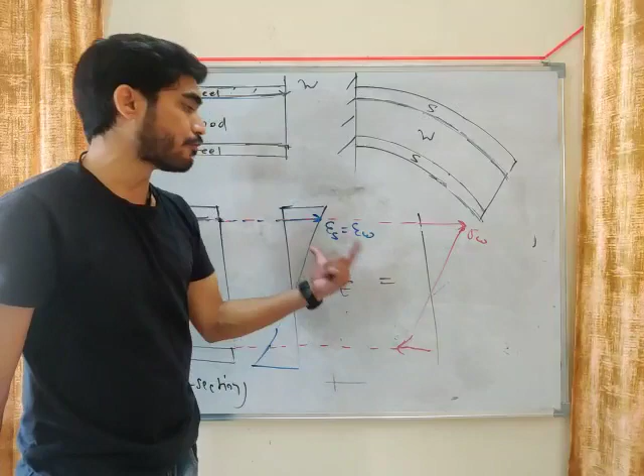But E of steel is very high. E of wood is, let's say, 10 gigapascal, then E of steel will be 200 gigapascal, 20 times more. So if you multiply E of steel into the epsilon of steel, you will get this much stress, because E of steel is very high.

So look at this. This is sigma of wood, this is sigma of steel. This is sigma of wood, this is sigma of steel. Sorry, this is sigma of wood, this is sigma of steel. Right? So look at this.

On this plane, epsilon of wood and steel are equal, but sigma of wood and steel are different. Why? Because sigma equals E into epsilon, and E of wood and E of steel are different.

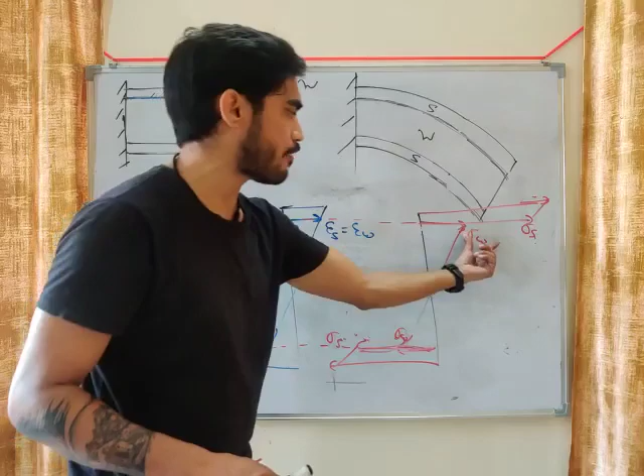So do you understand this concept? Do you understand this diagram, my friend? It will vary linearly, but you can see that on the same plane, sigma of wood is different and sigma of steel is different. I can prove it mathematically, I can write it mathematically also.

On this plane, epsilon of steel equals epsilon of wood. What will be epsilon? Sigma of steel divided by E of steel. According to Hooke's law, what will be epsilon of wood? Sigma of wood divided by E of wood. So what will you get? Sigma of steel will be sigma of wood into E of steel divided by E of wood.

This ratio, E of steel divided by E of wood, is known as modular ratio, my friend. Note this down - this ratio is known as modular ratio, denoted by M. So sigma of steel will be M into sigma of wood. On this plane, sigma of steel will be equal to sigma of wood multiplied by M. So whatever value of sigma of wood you are getting, multiply by M and you will get sigma of steel.

Do you understand this concept? Understand this diagram - on this plane where steel and wood both are touching each other, epsilon is equal for both, but sigma is different. Sigma of steel will be greater than sigma of wood, because E of steel is greater than E of wood. So if epsilon is same, why is epsilon same, do you understand that?

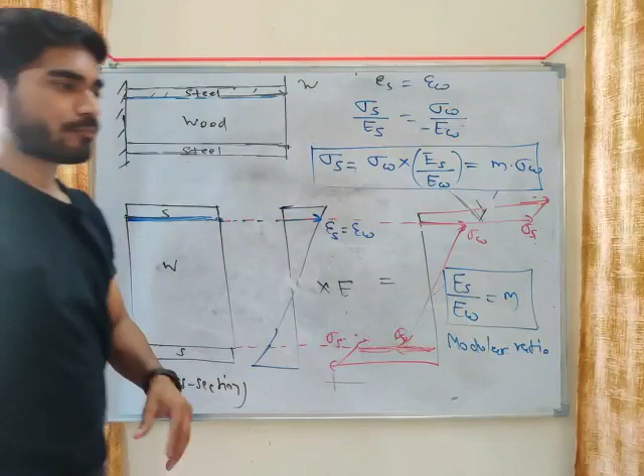When it will bend, change in length of steel and wood will be same. So epsilon is same, but sigma are different. So you see that sigma of wood is very less and sigma of steel is very high. Do you understand the problem here? Now we have to see how we can calculate these stresses.

I will tell you a very simple procedure to calculate sigma. First of all, note this down - modular ratio. What is modular ratio, my friend? Modular ratio means E of steel by E of wood. And modular ratio should always be greater than 1.

So let's say there are two materials. For the first material, Young's modulus is 100 gigapascal, and for the second material, Young's modulus is 200 gigapascal. So what will be M? It will not be 100 by 200, it will be written 200 by 100. So it should always be E greater by E less, it should always be greater than 1. Modular ratio is defined in that way.

All right, now we will consider a very simple example and we will see how to calculate the bending stress. So let's say we have the same example.

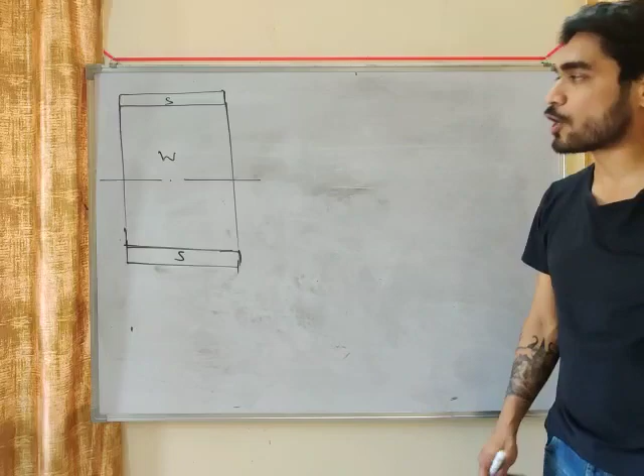Let's say we have two steel plates kept on a wooden beam. This is a wooden beam, these two are steel plates. Now we have to calculate bending stress in steel and in wood. Now what is our problem? The problem is this material is not homogeneous. Property of steel and property of wood are different.

So what we will do is either convert steel into wood or convert wood into steel. How do we do this? Let's say you want to convert wood into steel. These are steel plates, and the center material is wood.

Now I want to convert wood into steel. This is a rectangle with two dimensions, width and height. This is the height of wood, and this is the width of wood.

Now we have two options. We can either convert the height or convert the width. The problem is if we change the height, then the value of y will change. What is the equation? Sigma equals M y by I. So if we change the height, y value will change and your sigma will be wrong. So you can't change the height. You have to keep the height constant so that your y value does not change.

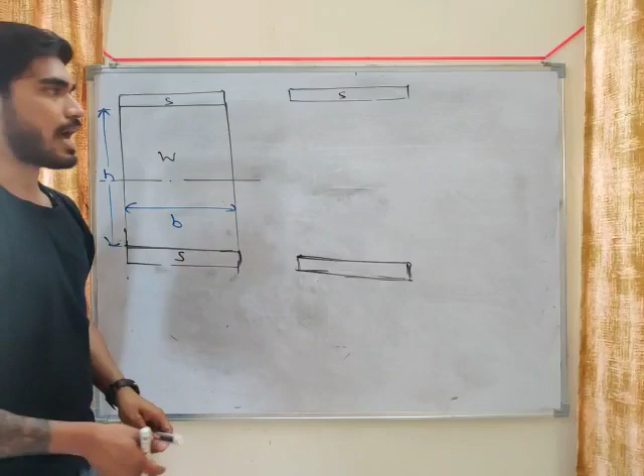So we have to change width, not height. Our objective is to convert wood into steel, and how will we do it? We will not change the height, we will change the width. So how do we change width? If you convert wood into steel, it will become like this. This will be the new width.

What will be the new width, my friends? The new width will be B by M. So now it is converted into steel. Now the entire beam is of steel.

So do you understand this concept? You can't change the height, because the y value will change. What is y? Vertical distance from neutral axis, which should remain constant. So h cannot be changed, we will change the width by dividing it by modular ratio m.

So you can convert the entire beam into steel. Right now it was steel and wood, but we have converted it into steel. This is an equivalent section of this.

Now we have another method. We can also convert steel into wood. So how will we convert steel into wood? This is the wood, keep the wood same, we will not change it. Now we will convert steel into wood.

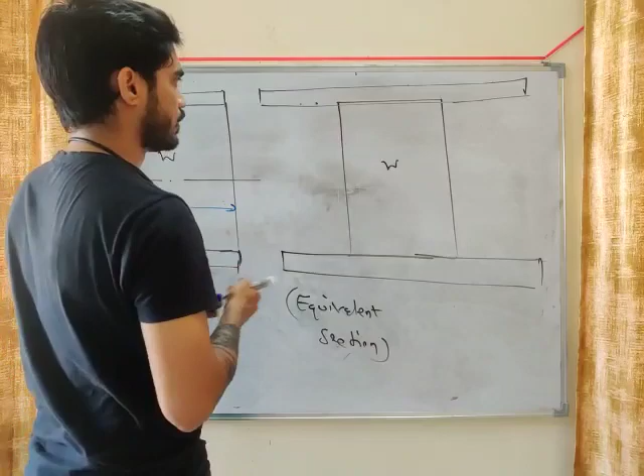Again we cannot change the height, we can change the width. The width of steel initially is B. If you convert it into wood, the width will increase. This will be the new width. How much will it be, my friend? This new width will be equal to B into M.

So now you have converted steel into wood. So what can we do? We can convert wood into steel - if you convert wood into steel, it will be B by M. And if you convert steel into wood, it will be B into M. So if you convert wood into steel or steel into wood, your cross section will become homogeneous.

Now our problem is solved. Our problem was that it was non-homogeneous, a different material. But now we have converted it into a single material, so our problem is solved. Now we can use this equation, sigma equals M y by I. Problem solved. But there is one more problem. What is that problem?

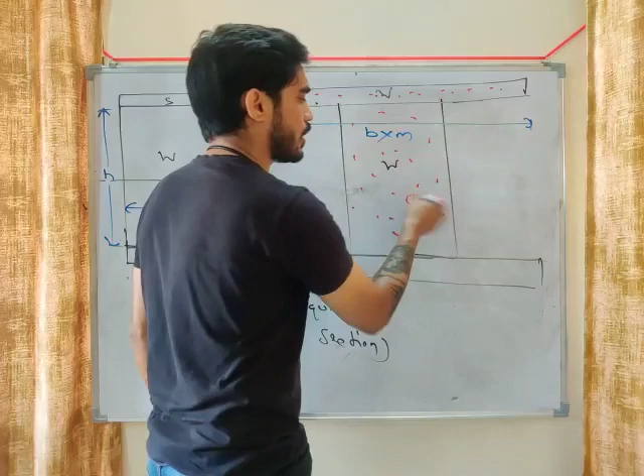If you calculate sigma using this equation, whatever you are getting here in wood is correct, but whatever you are getting here will be wrong.

Why? Because initially it was steel and now I have converted it into wood. Let's say here you are getting sigma equals 2 megapascal, and here sigma equals 5 megapascal. Let's say m is 10, just an example.

Now this 2 megapascal is correct, because earlier it was wood, now it is also wood. But this 5 megapascal is wrong, because earlier it was steel and now it is wood, and we know that stress in steel should be more than stress in wood.

So what we will do? We will multiply this 5 by m. What is m? 10. So the actual stress, sigma actual, will be 50 megapascal. If you are getting 5, actual will be 50.

Do you understand it? When you convert wood into steel, or steel into wood, whatever value you are getting is not the actual value. If you are getting 5, you have to multiply it by m.

Whatever you are getting in wood is correct, because you have converted steel into wood. So whatever you get in this region is correct, but whatever you get here is wrong, because you converted steel into wood. So if you are getting 5, the actual answer should be 5 into m.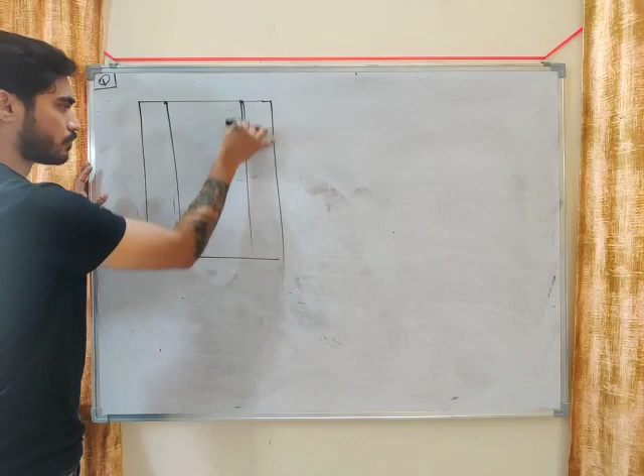This middle portion is made of steel. So this is a composite beam, a composite cross section. Center part is steel, this here is copper.

Let's give it dimensions. Let's say this is 10 mm, then this center width is 20 mm, then this width is 10 mm, and this height is 75 mm. So this is the cross section.

Young's modulus of steel is 200 gigapascal, Young's modulus of copper is 100 gigapascal. This beam is subjected to a bending moment of 5 kilonewton meter.

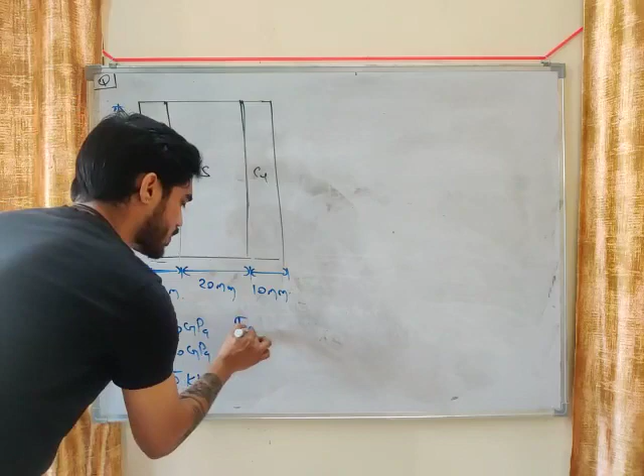And what do you need? Sigma maximum in steel, sigma maximum in copper. We need maximum normal stress in steel and maximum normal stress in copper. Okay, so this is your question.

Write this down and then we will start with the solution. Write this question, my friend, then we will start with the solution.

So we have the cross section, we have Young's modulus, we have bending moment, and we need the value of stress: maximum stress in steel, maximum stress in copper. So what will be our first objective?

Our first objective will be to convert it into an equivalent section. Right now it is not homogeneous, it is made of steel as well as copper. I will convert it into completely steel or completely copper. So what I will do is convert it into completely steel.

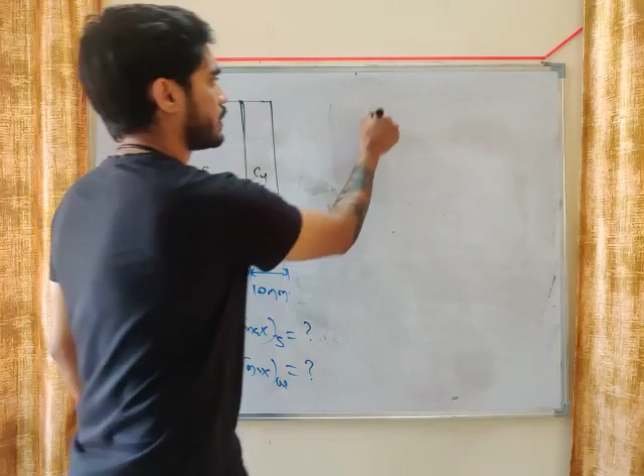Let's take an example. I will convert it into completely steel. So if you convert copper into steel, the width will decrease. So this will be the new cross section.

This will be the new cross section. Okay, now it has become steel, steel, steel.

Now what will be the value of modular ratio? Modular ratio will be E of steel by E of copper, right? So it will be 200 by 100, so modular ratio will be 2. I will convert copper into steel, so modular ratio will be 2.

So now this width will be how much? This width will be B by M, 10 by M. This width will be 10 by M means 5 mm. Earlier it was 10 mm, now I have to divide it by 2. So this will be 5 mm, this will be 5 mm.

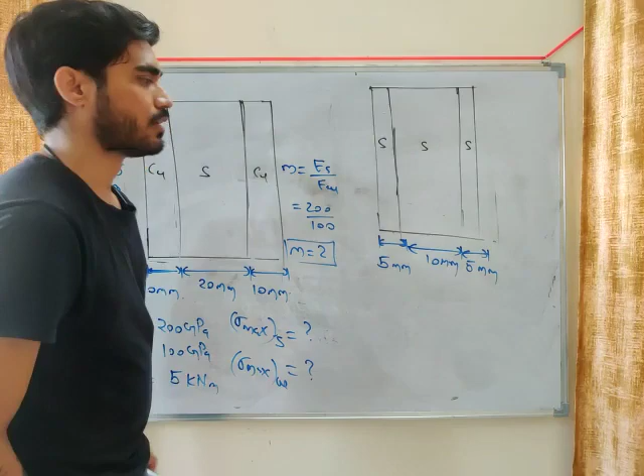If you convert steel into copper, then the width of steel will become M multiplied by this width. If you convert copper into steel, you have to divide by M. If you convert steel into copper, you have to multiply by M. So this will become 5 mm, 5 mm, this will remain 10 mm. And the height will remain same, we can't change the height. Why? If you change the height, then your Y value will change, so you can't change the height.

Now this problem has become this problem. We don't need this. Now what we will do, we will solve it using the same procedure that we saw yesterday. Sigma maximum will be equal to M into Y maximum by I.

Where will you get sigma maximum? This will be the neutral axis at the center, you will get the neutral axis at the center. Where will you get Y maximum? Y maximum will be at the top or at the bottom. Y maximum will be here. Sigma maximum will be here at the top.

So what will be M? M is 5 kilonewton meter converted into Newton mm, 5 into 10 to the power 6. What will be Y maximum? Total height is 75, so this Y maximum will be 75 by 2, or I can write 37.5, divided by I. What will be I? BH cube by 12. So what will be the width? 20 mm, the width will be 20 mm. What is the height? 75 cube by 12.

Calculate it, what you are getting? 5 kilonewton meter into 37.5 divided by BH cube by 12. Tell me what you are getting. You should get this, how much? Calculate it. Solve this and give me the answer, post your answer in the live chat and give me a thumbs up if you are getting this concept.

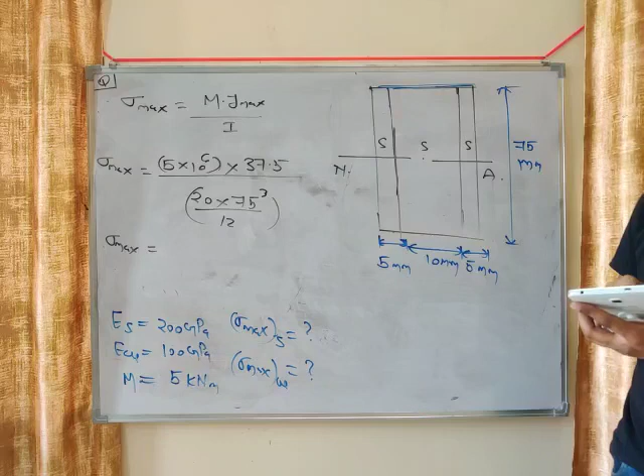So I can use this equation My by I. So M is 5 into 10 to the power 6, Y maximum is 37.5, divided by BH cube by 12. So how much will you get? 266.67 megapascal, you will get

266.67 megapascal, right? Wait a minute, my friend, wait a minute. This width was 10 mm or 20 mm? This width was 20 mm, right? This width was 20 mm. So sorry, this width was 20 mm, so this total width will be 30. This will be 20, okay, this was 20, by mistake I wrote 10. This is 20, so this will be 30. So what you will get, my friend, instead of 20, you have to put the width 30. Sorry, so sorry for the mistake, my friend.

So it will be 177.77. Sigma max will be 177.77 megapascal, right? So this is the answer, my friend.

But the problem is, whatever you are getting sigma max 177.77, it is correct for steel. But for copper, at the top of copper, this was earlier copper, so at the top of copper, the answer should not be this much. The answer in steel is correct, sigma maximum in steel will be this much, 177.77, because we have not converted steel. We have not done anything with steel, but we have converted copper into steel. So in steel, if you are getting this much stress, if you are getting 177.77, in copper it should be less. So what will be the answer?

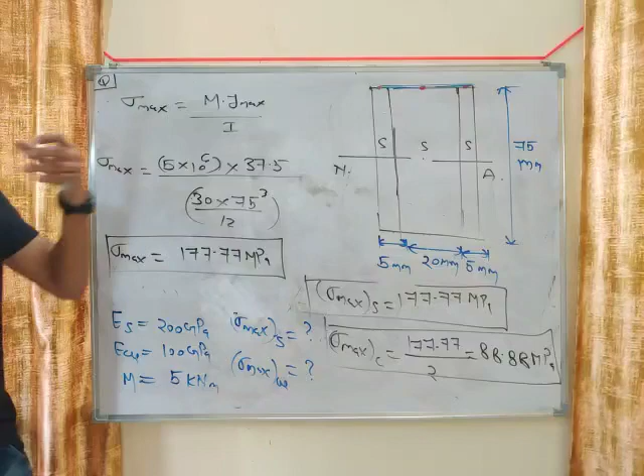Then whatever you calculate, if you converted copper into steel, whatever you get in steel, that is okay. But whatever you get in copper, that is wrong. Right now the stress is 177.77, but this is wrong for copper. For copper, the stress should be this divided by m. So this is the answer in copper. Do you understand, my friend? This is a very important concept.

Now this was the numerical, a very easy numerical. We will discuss a theory question based on the concept of composite beam.

Let's say we have three different types of composite beam. In one case, let's say we have a wooden beam like this, and we want to reinforce this wooden beam.

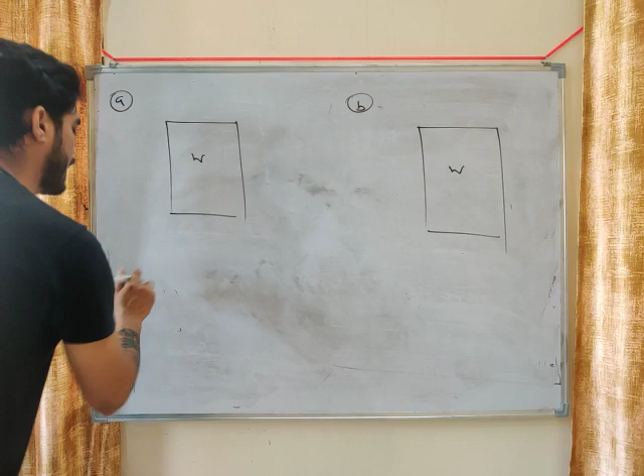So we have different options. In one case, I am putting one steel plate at the top, one steel plate at the bottom. Let's say the width of the steel plate is 5 mm. So I have put one steel plate at top, one at bottom, this is 5 mm, this is 5 mm. In the second case, I am putting the steel plate sideways like this, 5 mm, 5 mm.

In the third case, I am putting the steel plate like this, let's say this is 10 mm. And in the fourth case, I am putting the steel plate like this.

Okay, four options. You have a steel plate, and you want to reinforce the wood with the steel plate. In the first case, I put the steel plate one at top, one at bottom, 5 mm at top, 5 mm at bottom. In the second case, I put the steel plate sideways. In the third case, I put 10 mm at the center, and in the fourth case, I put 10 mm at the top.

Now tell me, which one will have the maximum strength, meaning which one will have the maximum capacity to sustain bending moment? If you apply bending moment, after one point it will break, so that will be the maximum bending moment it can sustain. So which one will have the maximum capacity to sustain bending moment? We have four options. Which one will be the best option? Tell me logically, which one will have the maximum capacity to sustain bending moment?

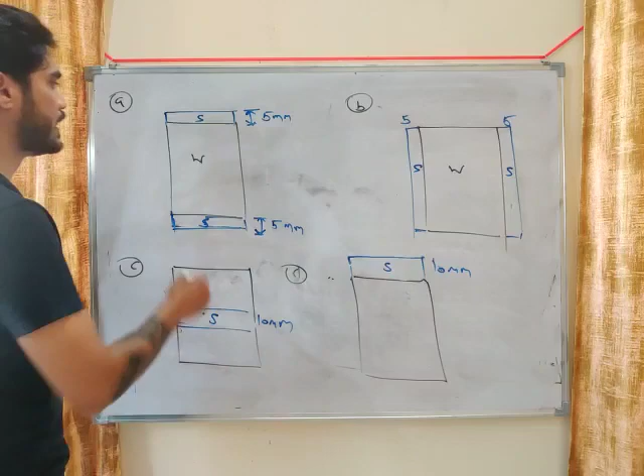The answer is this one. Why? I will explain it logically, my friend. You don't have to solve anything, you just have to put the logic. Now, what is the logic here?

See, if you are reinforcing a weak material with a stronger material, if you are reinforcing a weak material, wood, with a stronger material, steel, always put the stronger material away from the neutral axis. The stronger material should be away from the neutral axis.

Why? See, bending stresses vary linearly. Bending stresses will vary linearly like this.

So whatever material you are putting away, that material will have the maximum internal force. Now if you want to increase the resistance, then the stronger material should be away, right? Maximum resistance will be away, so if you want to increase the resistance, you have to put the stronger material away.

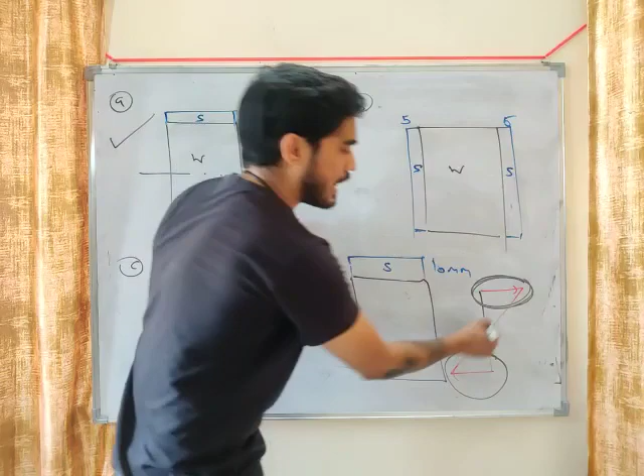Stronger material should be here, stronger material should not be here. Here the internal resistance is very less, here the internal forces are very less, so stronger material should not be here. Stronger material should be here and here, because internal forces are greater here. So stronger material should have the maximum internal force.

Okay, so maximum internal forces are developed away from the neutral axis. So stronger material should be away from neutral axis. Now in which case is the stronger material away from neutral axis at maximum distance? In this case, the stronger material is nearest to neutral axis. Neutral axis is at the center, and you have put the stronger material near the center.

So this is the least strong material. This will have the minimum strength, and this will have the maximum strength.

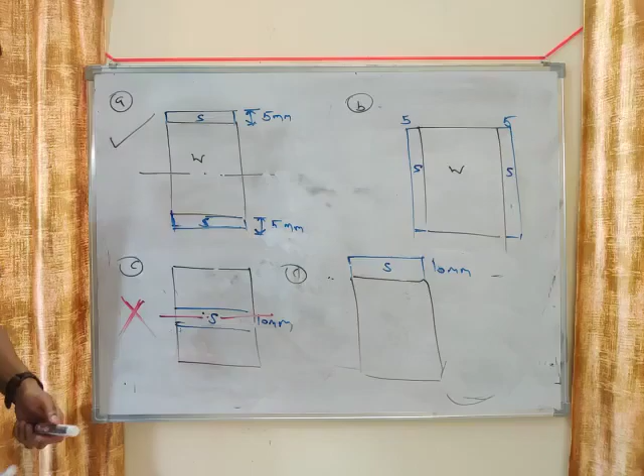Okay, I will give you one more procedure to find which one will be the strongest. What you can do is convert this section into an equivalent section. So if you convert this section into an equivalent section, what you will get?

If you convert wood into steel, you will get something like this. So in this case, you will get an I section. Convert wood into steel, you will get a rectangle.

Convert this, you will get a plus section. Convert this, what you will get? You will get a T section. Convert wood into steel, you will get a T section.

Okay, so here I have converted wood into steel, so it has become an I section. Here I converted wood into steel, it became a rectangle. Here I converted wood into steel, so it became a plus section, and here again I converted wood into steel, so it became a T section.

Out of these sections, which will have the maximum moment of inertia? I section, rectangle, T section, plus section - which one will have maximum moment of inertia? I section. And if this has maximum moment of inertia, this will be the strongest.

So very easy concept. If you are not able to understand like that, understand it like this. One thing I told you, that the stronger material should be away from neutral axis. So the case where stronger material is away from neutral axis, that will be the best. But if you are not able to understand it like that, convert this into an equivalent section and then compare their moment of inertia.

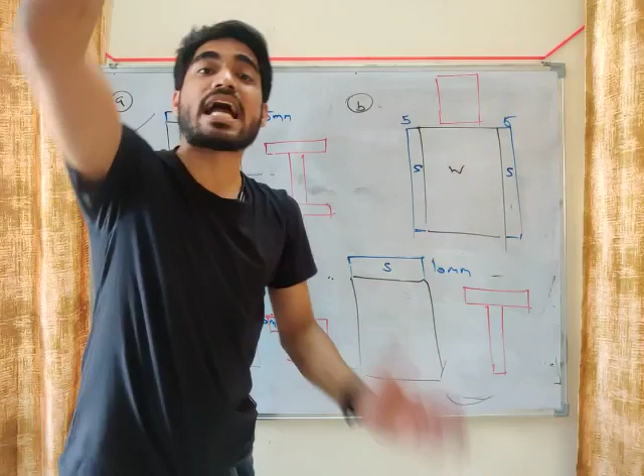And which one will have the least moment of inertia? This one. What is moment of inertia? Area into distance squared. So which area is at maximum distance? This area is at maximum distance, right? This area is at minimum distance, this area is at maximum distance. So moment of inertia of this is maximum, so this will be the strongest.

This is a theory question that has been asked many times in other exams, in PSU exams, in civil services. This is a very important theory question. Out of these four cases, which one will be the best? This one will be the best, and this one will be the worst. So do you understand the concept of composite beam, my friend? Very good, understand this concept.

Today we saw three very important concepts: combined axial load and bending, then beam of uniform strength, and then composite beam. These were the three very important concepts that I have explained to you today. Please note these things down and try to solve problems related to these concepts.

In the next chapter, we will discuss how to calculate shear stresses in beams. That is also a very important topic, and you get a lot of questions from shear stresses in beams. Then after that, we will start a very interesting topic: deflection of beams. So bending stresses in beams was this much. In the next chapter, we will see shear stresses in beams, and then we will start with deflection of beams.